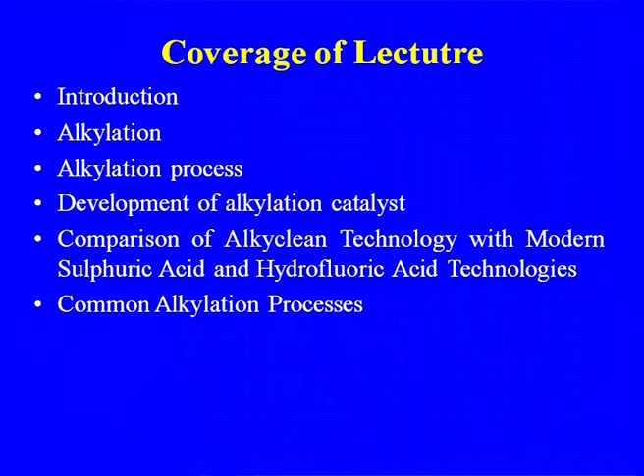Coverage of the lecture: the introduction, alkylation process, development of the alkylation catalyst, comparison of Alkyclean technology with modern sulfuric acid and hydrofluoric acid, common alkylation processes. Then isomerization, which will have again the introduction, isomerization catalyst, once through process, isomerization of light naphtha, UOP isomerization technologies, and then polymerization, some of the technologies available for polymerization or oligomerization, which, as I told you, are for improving the octane number.

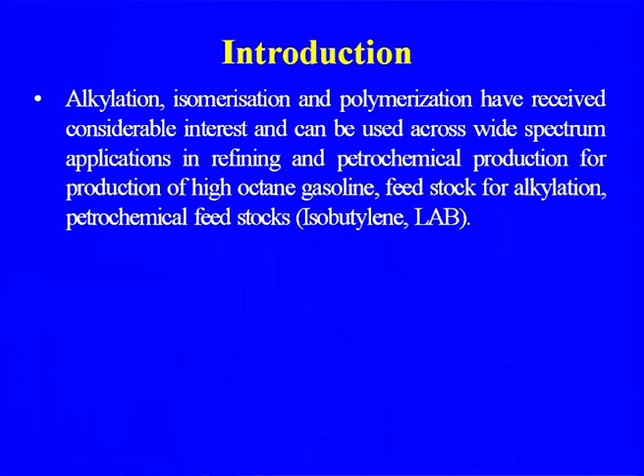Alkylation, isomerization and polymerization have received considerable interest and can be used across a wide spectrum of applications in refining and petrochemical production, for production of high octane gasoline, feedstock for alkylation, and petrochemical feedstock, just like isobutylene or linear alkyl benzene, where we are also using the alkylation process. Let us discuss alkylation. The feed is petroleum gas, olefin and isobutane, sourced from distillation and cracking; the process is unification, the product is high octane gasoline, and the application is the gasoline pool.

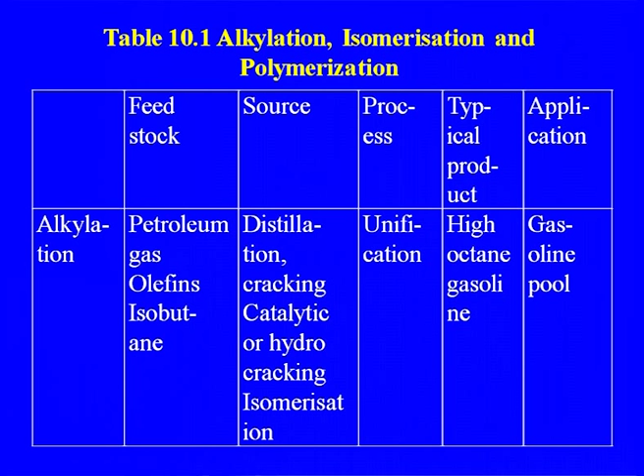Similarly, isomerization: feedstock n-butane, normal pentane, normal hexane, sourced from various refinery processes. The process is rearrangement, and the typical products are isobutane, isopentane, isohexane, and the application is alkylation and gasoline, which will go to the gasoline pool.

Polymerization: light olefins, C2, C3, C4, from various refinery processes. This process has become important with more and more FCC and generation of more light olefins, and those light olefins can be used in these processes for upgrading the octane number. The process is unification, the typical products are high octane naphtha and petrochemical feed, and the application is the gasoline pool.

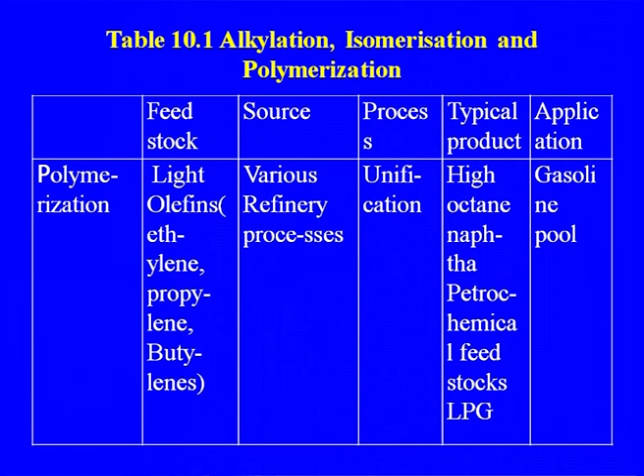Now, let us discuss alkylation. Alkylation is an important unit in the refinery to upgrade light olefins and isobutane into a high value gasoline component. Light olefins are produced mainly by catalytic cracking, from the FCC gases which we are recovering now, and there has been a lot of emphasis in refineries to separate the various useful C4 components, because C3 propylene we are already recovering. Alkylate is one of the best gasoline blends because of its high octane number.

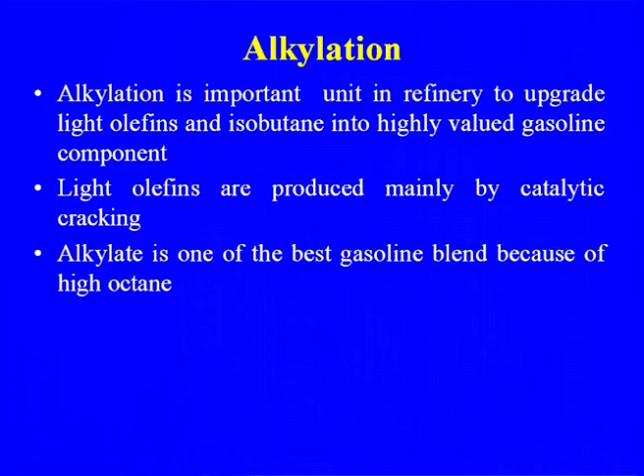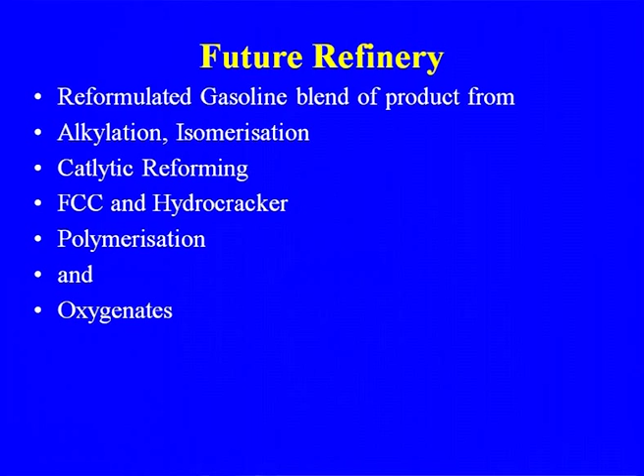So in the future refinery, we cannot totally depend upon crude oil distillation or only catalytic cracking or catalytic reforming; the gasoline pool will be a blend of various high octane gasolines from the various conversion processes. Reformulated gasoline will be a blend of products from alkylation, isomerization, catalytic reforming, FCC and hydrocracker, polymerization, plus addition of oxygenates, meaning methanol or alcohol. That will increase the total output of the refinery and at the same time give a better octane number.

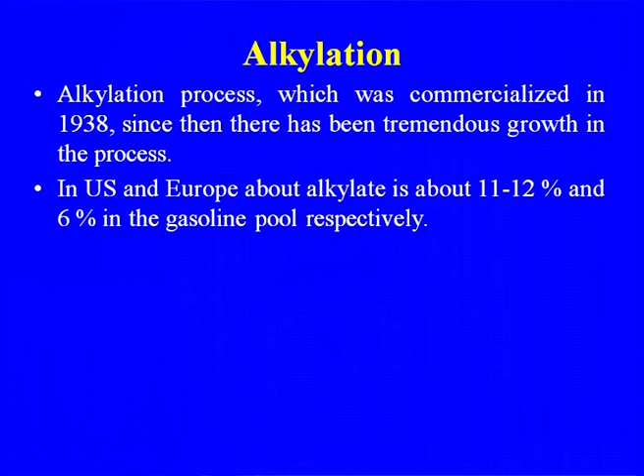The alkylation process was commercialized in 1938, and since then there has been tremendous growth in the process. Alkylate is about 11 to 12% of the gasoline pool in the US and 6% in European countries, but in India we still do not have the alkylation process in most refineries. I think the new refinery in Bathinda might have alkylation in it.

One of the major constraints in the adaptability of the alkylation process is the catalyst. We will be discussing the catalysts we are using and their development: the change from sulfuric acid to hydrofluoric acid, and from hydrofluoric acid to solid acid. These are some of the developments in alkylation, and in the future the alkylation process is going to play a very important role in increasing the octane number and at the same time enhancing the production of gasoline.

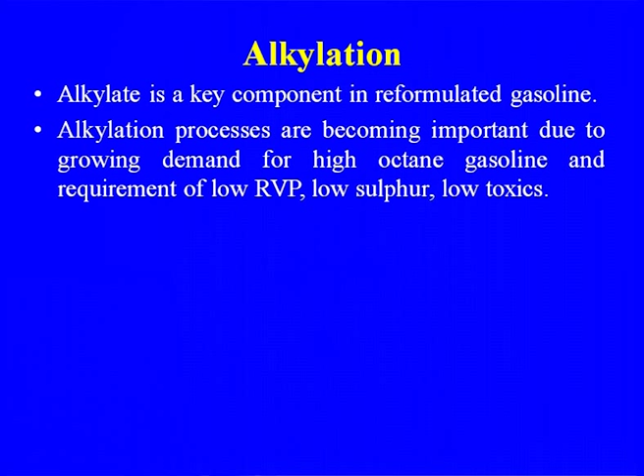Alkylate is a key component in reformulated gasoline. Alkylation processes are becoming important due to growing demand for high octane gasoline and the requirement of low Reid vapor pressure, low sulfur and low toxicity. Alkylate is an ideal blend stock to meet these requirements.

The process of alkylation of different isoparaffins using olefins was developed during the 30s using aluminum chloride catalyst. However, the catalyst was later replaced by sulfuric acid and hydrofluoric acid. We will discuss the problems when we compare these catalysts, sulfuric acid to hydrofluoric acid; in the case of hydrofluoric acid a lot of corrosion problems were there. So now the shift in catalyst is from HF to solid acid catalyst. Alkylation of the C5 cut from the FCC can significantly reduce the RVP of the finished gasoline pool.

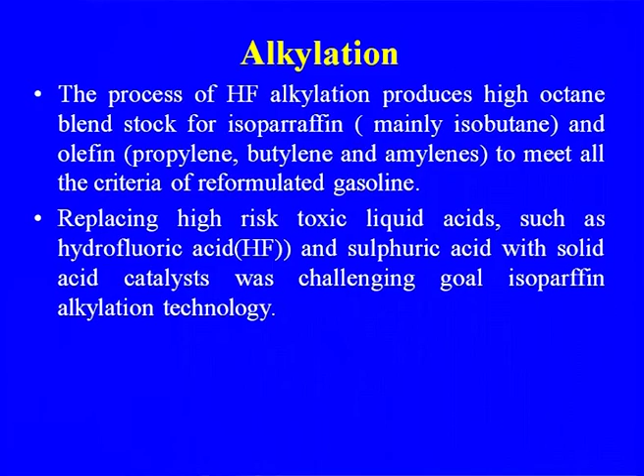Hydrofluoric alkylation was the earlier alkylation process, and it is still being used in many refineries. HF alkylation produces high octane blend stock from isoparaffin, mainly isobutane, and olefins, propylene, butylene and amylene, to meet all the criteria of reformulated gasoline. Replacing high risk toxic liquid acids such as hydrofluoric acid and sulfuric acid with solid acid catalyst was the challenging goal in isoparaffin alkylation technology, and this is the major development in catalysts: the shift from sulfuric acid to hydrofluoric acid and from hydrofluoric acid to solid acid catalyst.

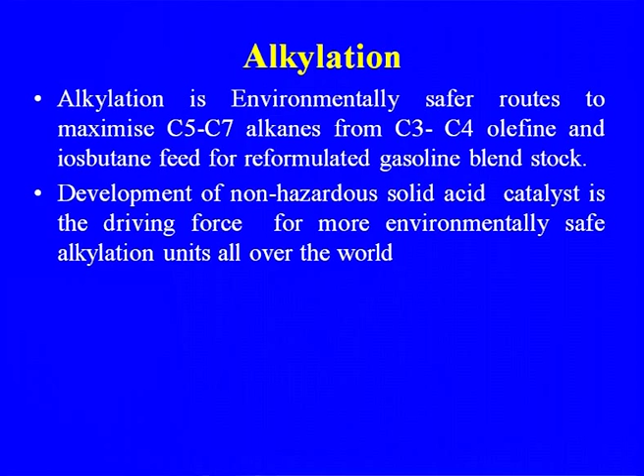So why we are going for alkylation: it is an environmentally safer route to maximize C5-7 alkanes from C3, C4 olefin and isobutane feed for reformulated gasoline blend stock. Development of non-hazardous solid acid catalyst is the driving force for more environmentally safe alkylation units all over the world, and now slowly mills are changing, going for the solid acid catalyst alkylation process.

Butylene alkylation is one of the most commonly used processes. However, for alkylation of amylenes, the C5 cut, as I told you, there is now more and more interest in recovery of C4 and C5 gases from the refinery. In some refineries, C4 isobutylene is used for making MTBE, methyl tertiary butyl ether, which is used as an oxygenate, but as I told you earlier, there is now a ban on the use of MTBE in many developed countries.

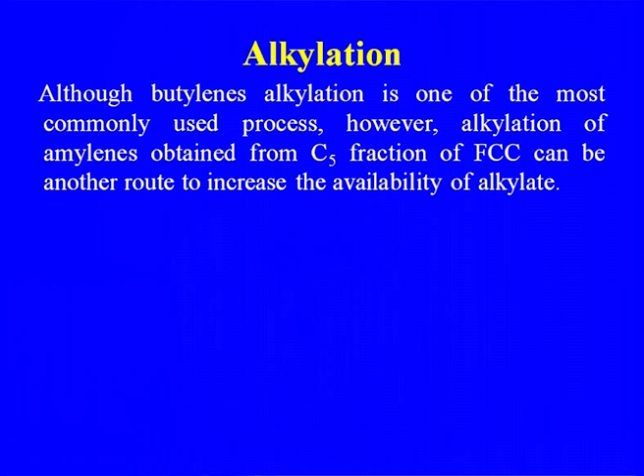So alkylation of amylenes obtained from the C5 fraction of FCC can be another route to increase the availability of alkylate, because the C5 fraction we are still not alkylating. C5 amylene alkylation has a two-fold advantage: it increases the volume of alkylate available while decreasing the Reid vapor pressure and olefinic content of the gasoline blend stocks.

The reaction involved in alkylation consists of conversion of isobutane and butylenes to isooctane using HF catalyst or solid acid catalyst, whatever catalyst you are using. The side reactions taking place result in increased isobutane consumption, increased acid consumption, increased acid soluble hydrocarbon formation, and equipment handling and corrosion problems.

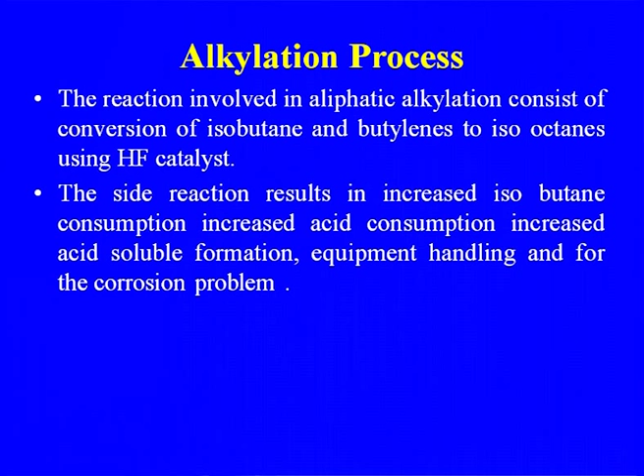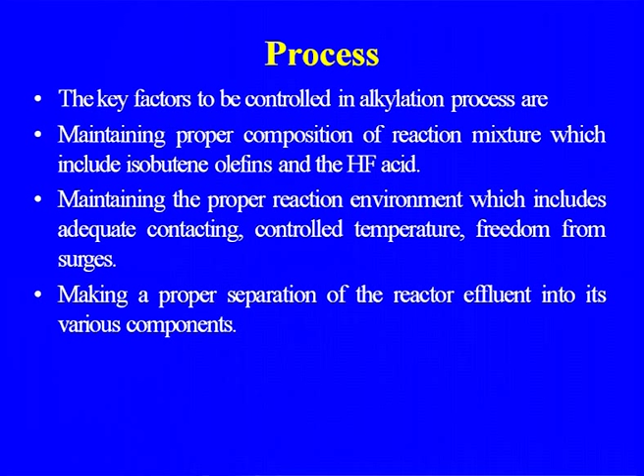The key factors to be controlled in the alkylation process are maintaining proper composition of the reaction mixture, which includes isobutane, olefins and the HF acid; maintaining the proper reaction environment, which includes adequate contacting, controlled temperature, and freedom from surges; and making a proper separation of the reactor effluent into various components.

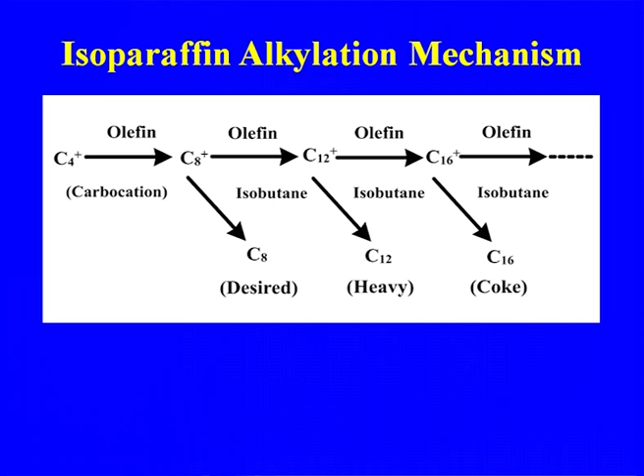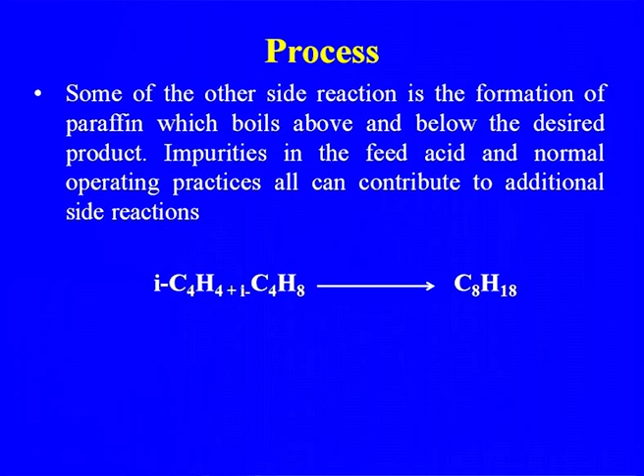So, let us discuss now the number of alkylation processes that have been developed depending upon the catalyst that is being used. The ConocoPhillips process, that is the alkylation of propylene, butylenes, pentenes and isobutane to high quality motor fuel using hydrofluoric acid catalyst.

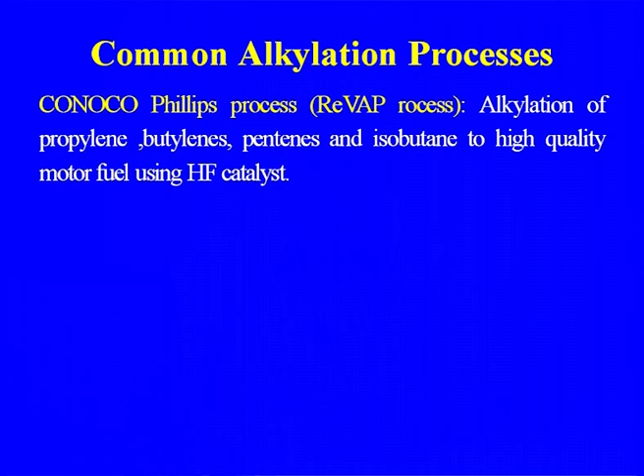UOP Alkylene process is based on the solid acid catalyst for alkylation of the light olefins. While discussing LAB we discussed the solid acid catalyst. Now, the alkylation process for LAB manufacture is based on the solid acid catalyst. Similarly, in the refinery also, the future refinery is not going to use HF, but solid acid catalyst for alkylation. So, this is the development of the catalyst by UOP.

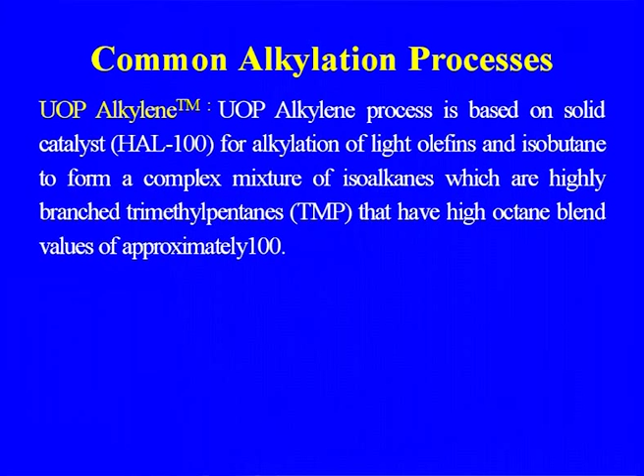So, the UOP Alkylene TM process uses the solid acid catalyst for alkylation of the light olefins and isobutane to form a complex mixture of isoalkanes, which are highly branched trimethyl pentanes that have high octane blend values of approximately 100. So, this is what our interest is, to have highly branched paraffins.

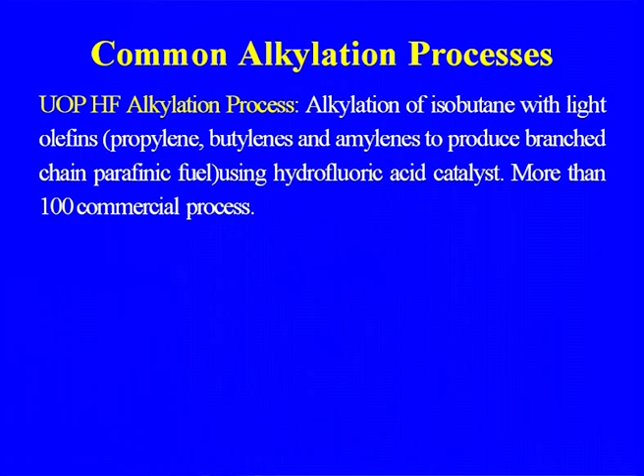UOP earlier had the HF process also. The UOP HF process is alkylation of isobutane with light olefins, propylene, butylenes and amylenes, to produce branched chain paraffins using hydrofluoric acid catalyst. That was more than 100 commercial processes, because most of the alkylation processes earlier started in refining were based on HF, but because of the highly corrosive nature of HF and the cost involved, and environmental constraints, the new refineries are shifting from HF to solid acid catalyst.

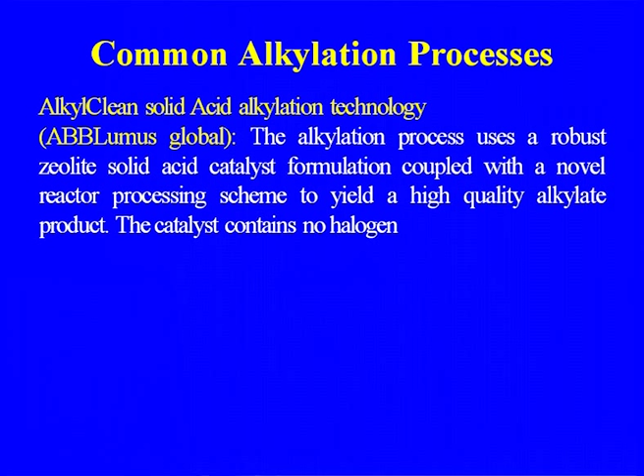ABB Lummus Global alkylation process uses a robust zeolite solid acid catalyst formulation coupled with a novel reactor processing scheme to yield a high quality alkylate product. The catalyst contains no halogen. Exxon alkylation process: alkylation of propylene, butenes, pentenes with isobutane in the presence of sulfuric acid catalyst using auto refrigeration, producing a low sensitivity, highly iso, low RVP, high octane gasoline blend stock.

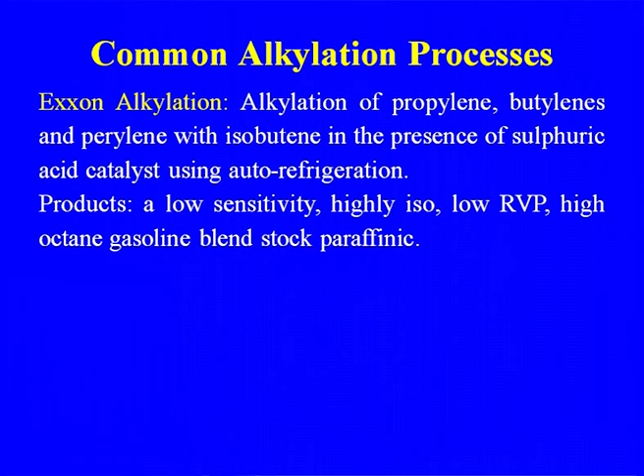But the only problem here is the use of sulfuric acid. Stratco's process: alkylation of propylene, butylenes and amylenes with isobutane using strong sulfuric acid to produce high octane branched chain hydrocarbons using the effluent refrigeration alkylation process, because low temperature is also one of the requirements of the process.

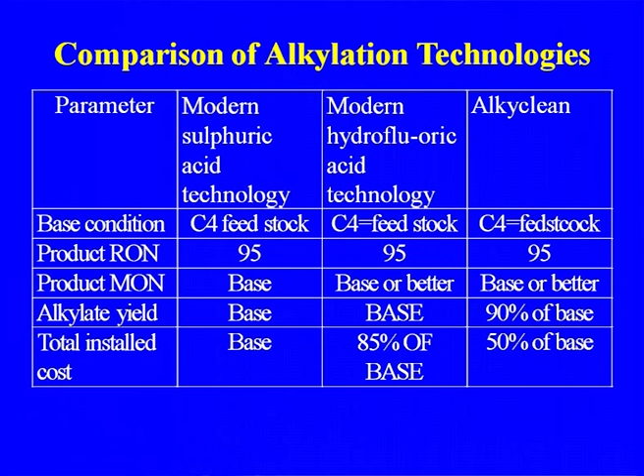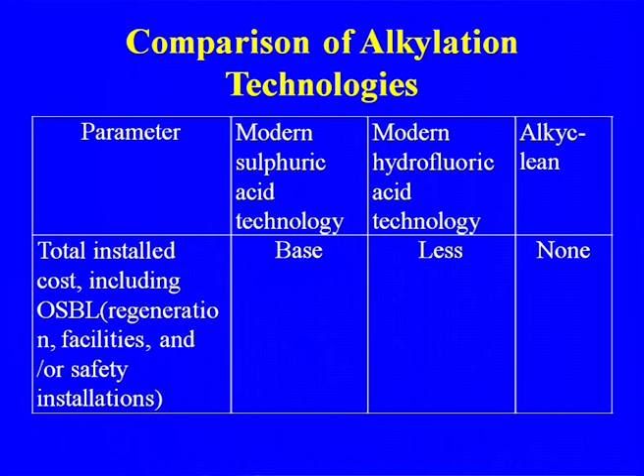Total installed cost is less here than sulfuric acid when you are using the catalyst. Total installed cost in case of hydrofluoric acid is less. Equipment maintenance is high versus much lower, that is one of the major advantages of the solid acid catalyst, the corrosion problem. Equipment maintenance is very high for sulfuric acid and hydrofluoric acid catalysts, and that is the reason why we are going for solid acid catalyst.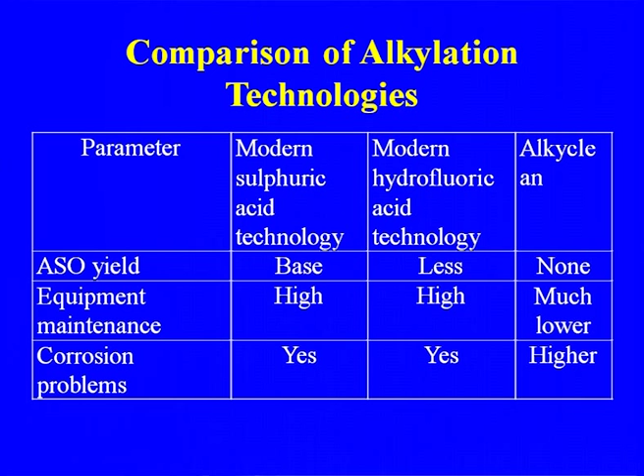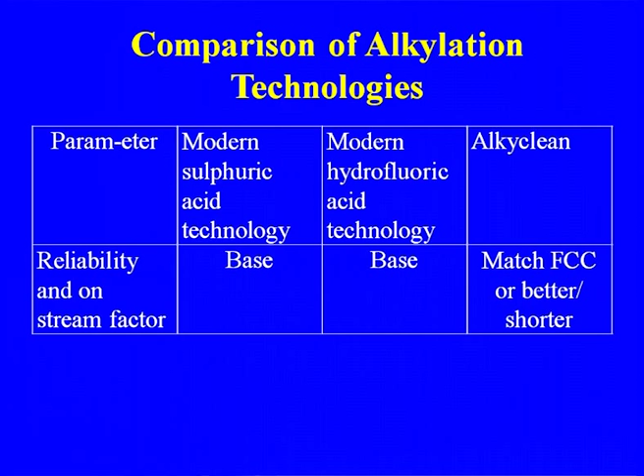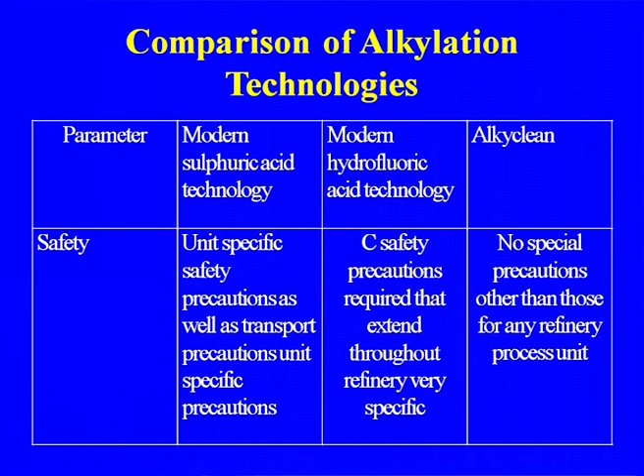Reliability on the stream factor, matching FCC or better. Safety: unit specific safety precautions as well as transport precautions, because depending upon the unit, safety precautions are required that extend throughout the refinery, because of the highly corrosive nature. Here no special precaution is needed, that is again one of the advantages of the solid acid catalyst.

Catalyst: here the zeolite catalyst. Environmental significance. Actually, if you compare HF and H2SO4, the amount of HF required is much less than what we use in sulfuric acid alkylation. And this was one of the reasons for shifting from sulfuric acid to hydrofluoric acid alkylation. So, in case of the solid acid catalyst, no emission to air, water or ground.

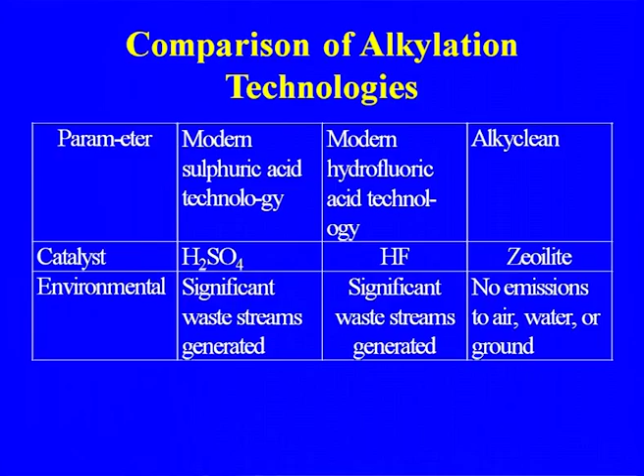This was about the alkylation process and the importance of the alkylation process. As I told you, the Indian refineries are not having alkylation; isomerization they already have. So more and more alkylation may come in the future, and with the development of solid acid catalysts it will be easier to go for alkylation than deal with the problems of sulfuric acid handling and corrosion.

Now the isomerization part. Just like alkylation, isomerization is also playing a very important role in the refinery as a major conversion process for improvement of the octane number, because the various streams produced in the refinery are low octane number products. So how to improve? One step for improving the octane number is the isomerization process. Petroleum fractions contain significant amounts of normal alkanes, and the isomerization of alkanes into the corresponding branched isomers is one of the important processes in petroleum refining.

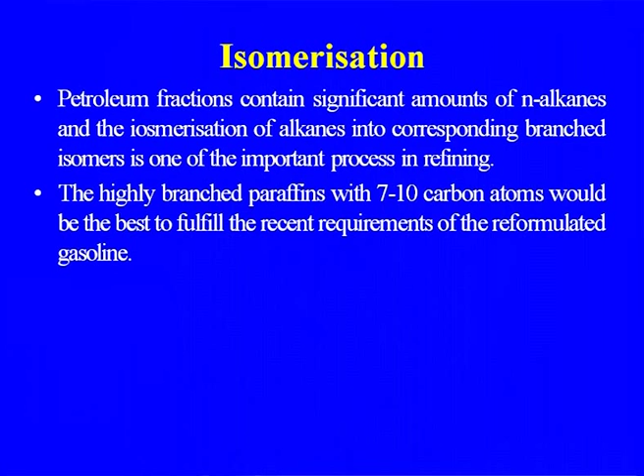The highly branched paraffins with 7 to 10 carbon atoms would be the best to fulfill the recent requirements of reformulated gasoline. What are the driving forces of light paraffin isomerization? Earlier, even Indian refineries did not have isomerization, but some refineries already have it now, and the new refineries are definitely going to have the isomerization part.

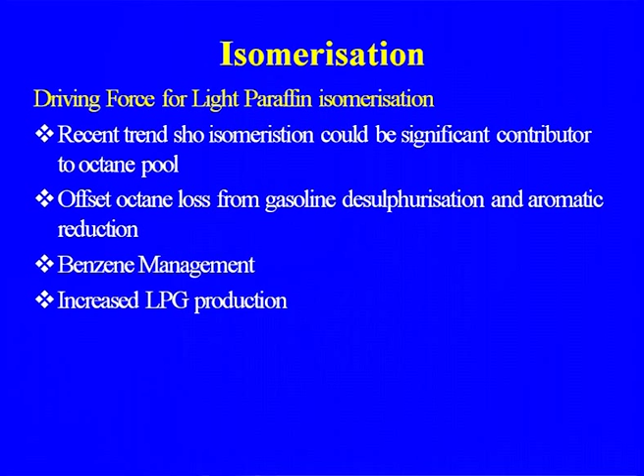So, driving force for light paraffin isomerization: the recent trend shows isomerization could be a significant contributor to octane number, offsetting octane loss from gasoline desulfurization and aromatic reduction, benzene management, and increased LPG production. For benzene reduction as per Euro 4 norms, the benzene content of gasoline has to be reduced to the recommended 1%. So now they are going for isomerate, including naphtha isomerization, and that will go to the gasoline pool.

The driving force is the emphasis on production of highly branched C5 to C7 alkane isomers from normal alkanes at low temperature for use in reformulated gasoline, to improve the octane number and the RVP, Reid vapor pressure, because RVP is also included in the standards and has to be controlled.

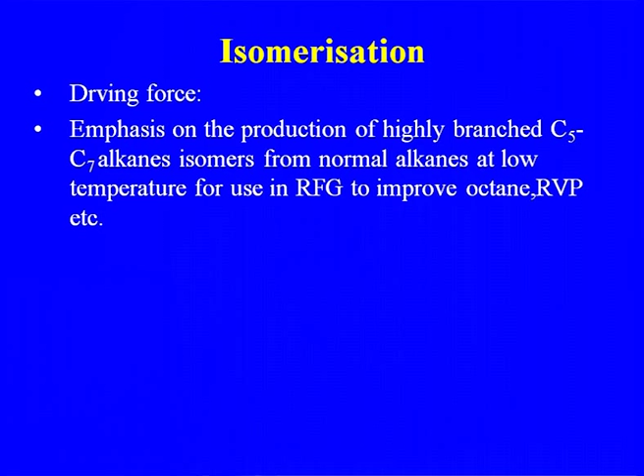Isomerate as a percentage of gasoline was widely implemented in the USA during the lead phase-out period, because that was when the requirement was how to improve the octane number. Tetraethyl lead was added, but because of environmental problems lead was phased out. Even Indian refineries no longer use tetraethyl lead for improving octane number; it has been phased out all over the world because of lead pollution. The US implemented isomerization in refineries, and more than 8% of their gasoline comes from isomerate.

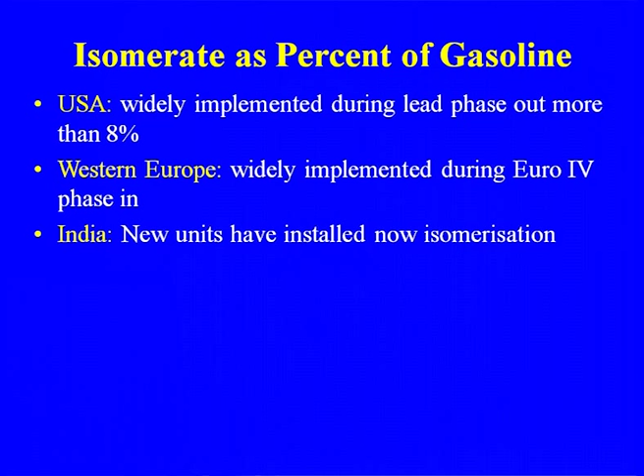Western Europe widely implemented it during the Euro 4 phase-in, and even some Indian refineries are now ready to provide Euro 4 fuel. New Indian units have now installed isomerization, but there is still a lot of scope for further isomerization processes in Indian refineries.

Now let us discuss isomerization. The production of paraffin-based high octane gasoline blend stocks such as isomerate from isomerization of light and mid-cut naphtha might be a key technology for gasoline supply to cope with future gasoline regulation. We are producing low octane naphtha, and as more gas crackers come, more naphtha will be available in the refinery, so converting low octane naphtha to high octane by isomerization will boost refining economics. Light naphtha and paraffin isomerization is recognized as an emerging technology to boost octane in light gasoline fractions.

Recent price trends show isomerization could be a significant contributor to the octane pool, offsetting the loss from gasoline desulfurization and aromatic reduction, because desulfurization has now become an integral part for removing traces of sulfur to meet Euro 3 or Euro 4 requirements.

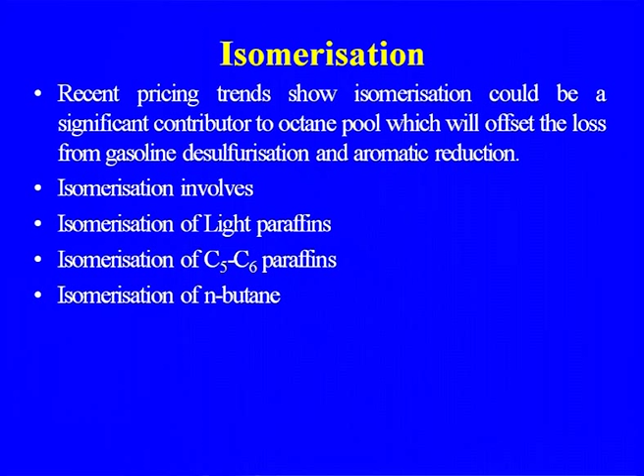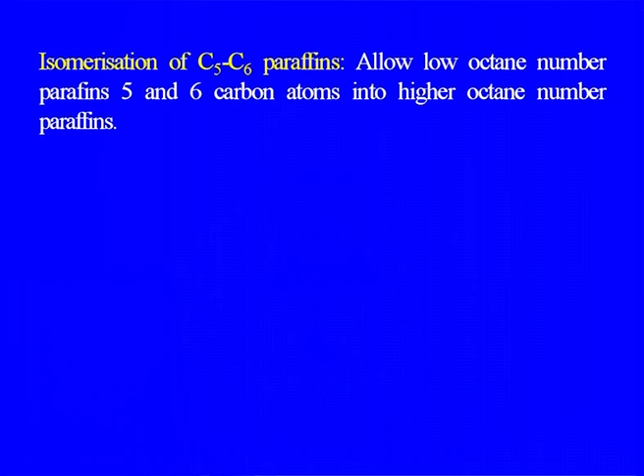Isomerization involves isomerization of light paraffins: isomerization of C5 C6 paraffins and isomerization of n-butane. Isomerization of C5 C6 paraffins converts low octane number paraffins with 5 and 6 carbon atoms into higher octane number paraffins. This is the advantage when you go for isomerization of C5 C6.

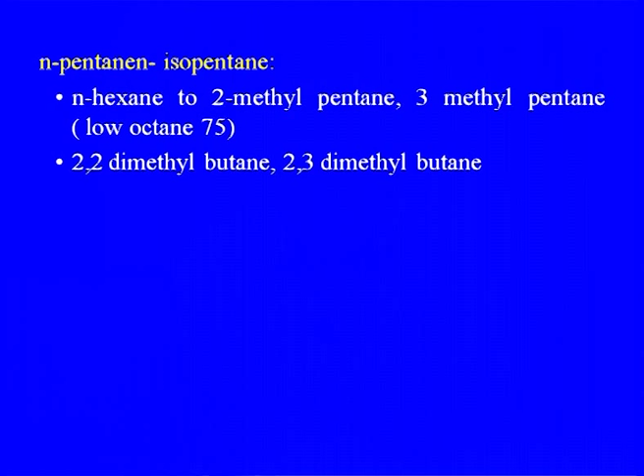N-pentane to isopentane, N-hexane to 2-methylpentane, 2,2-dimethylbutane, 2,3-dimethylbutane. Isomerization of N-butane to produce isobutene feed for alkylation or a source of isobutene dehydrogenation for the manufacture of MTBE.

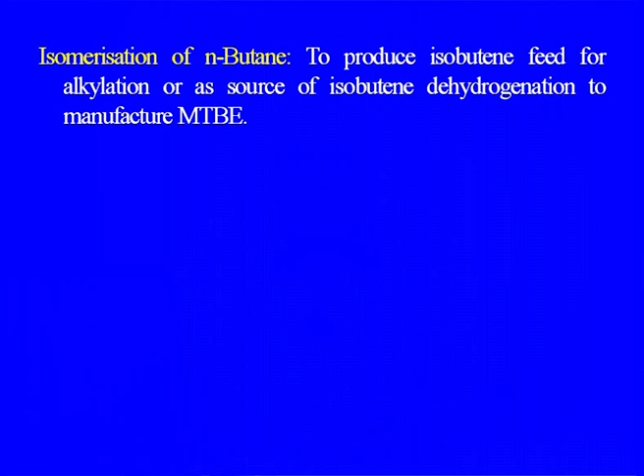Isomerization catalyst: as I told you, there has been continuous development in the isomerization process in the refinery. Two types of isomerization catalyst, zeolite and chlorinated alumina, have been used. The zeolite catalyst requires higher temperature and provides a lower octane boost, while chlorinated alumina results in the highest octane. However, it has higher sensitivity to feedstock impurities, requiring strict feed pretreatment to eliminate oxygen, water, sulfur and nitrogen containing compounds.

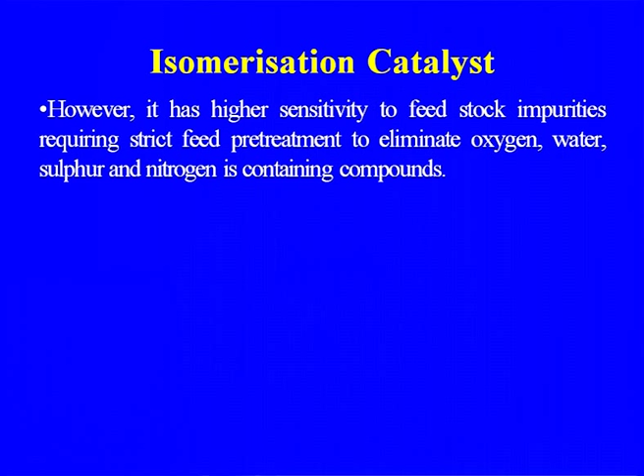Isomerization catalyst, as I told you, may be zeolite or chlorinated alumina. Zeolite catalyst requires higher temperature and provides a lower octane boost. Chlorinated alumina results in the highest octane; however, it has a higher sensitivity to feed impurities.

Isomerization of light naphtha: as I told you, some of the crude oils we have are more paraffinic. So, what to do with the light naphtha, which is more paraffinic and whose octane number is low? Many refineries have gone for isomerization of the light naphtha to improve the octane number. C5/C6 feed, either from straight-run crude distillation or from catalytic reforming, goes to the isomerization process. The reformate is separated into lighter, mostly benzene, and heavier containing C7. Catalyst: zeolite or platinum on chlorinated alumina.

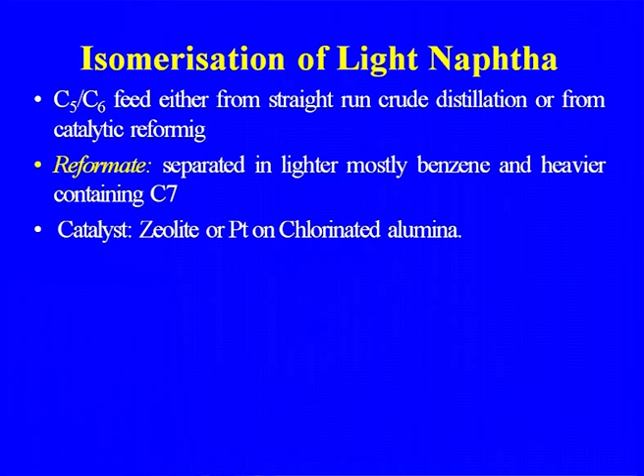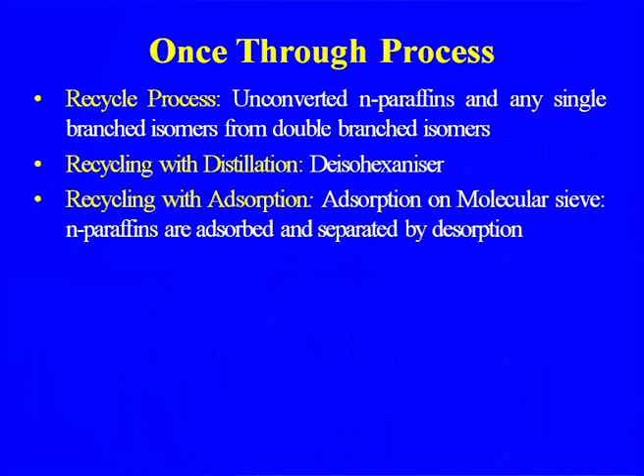Process: a recycle process separates unconverted normal paraffins and single branch isomers from the double branch isomers; recycling with distillation, where a deisohexanizer is added; recycling with adsorption, where the paraffins are adsorbed on molecular sieve and separated by desorption. So, these are some of the various types of configuration in the isomerization process.

As I told you, there has been continuous development in the catalyst, and a huge amount of money in refining is being invested for improvement of catalysts, whether FCC catalyst, catalytic reforming catalyst, or isomerization catalyst.

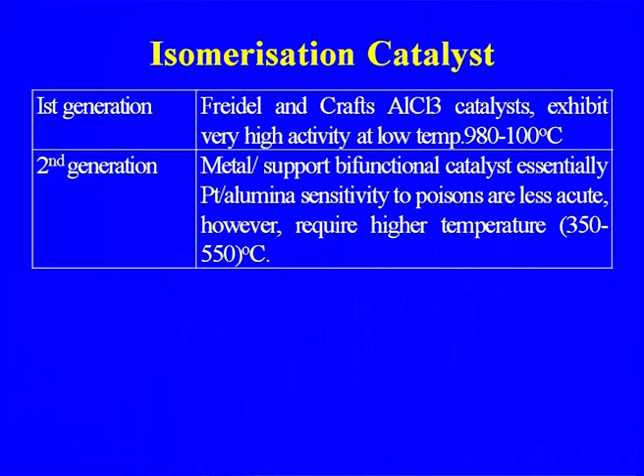First generation catalyst, from the Friedel-Crafts reaction: aluminum chloride exhibits very high activity at low temperature. Metal support bifunctional catalyst, essentially platinum alumina: sensitivity to poisons is less acute, however it requires higher temperature. Third generation metal support bifunctional catalyst with increased acidity by halogenation of the alumina support: sensitive to poison and needs pretreatment, corrosion problem, high activity at low temperature.

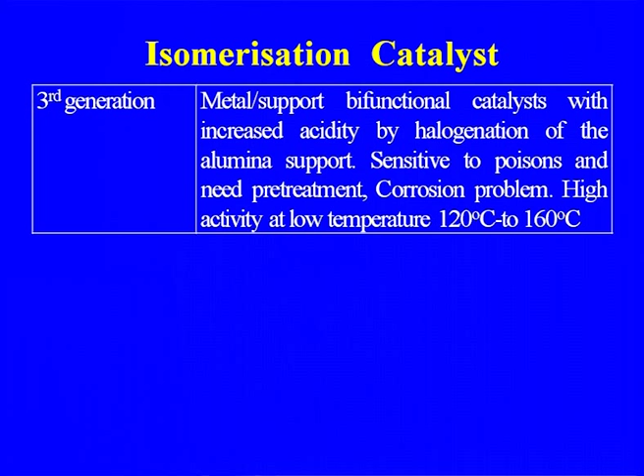Fourth generation bifunctional zeolite catalyst: very resistant to catalyst poison, and the feed does not need any pretreatment. So, these are the changes that have taken place in the catalysts used in the isomerization process. In all the catalysts, one of the problems is the presence of impurities in the feedstock.

Now, let us discuss some of the processes available for isomerization. UOP Butamer process: catalyst platinum chlorinated alumina, operating temperature 180 to 220, pressure 15 to 20 bar, space velocity 2 per hour, hydrogen to hydrocarbon ratio 0.5 to 2.

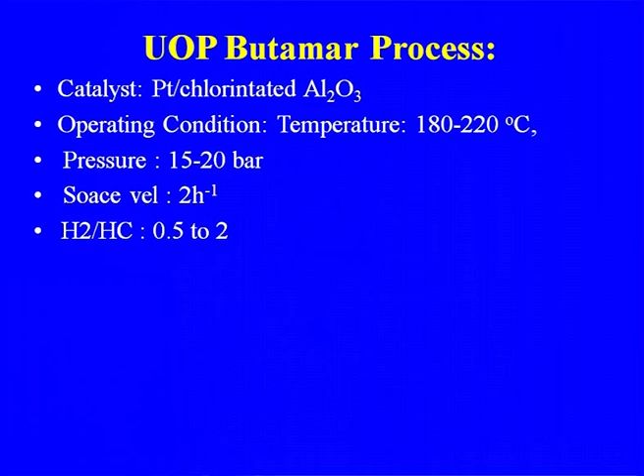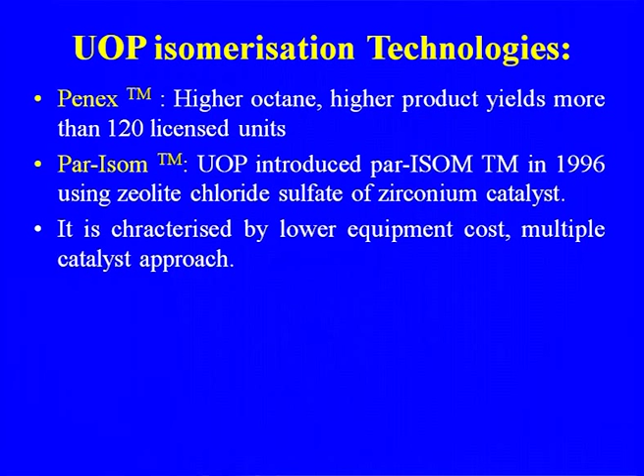Par-Isom TM: UOP introduced this process in 1996 using zeolite and sulfated zirconia catalyst. It is characterized by lower equipment cost and a multiple catalyst approach. Now, this was about isomerization and its importance in the refinery, where you can convert low octane hydrocarbons to high octane hydrocarbons.

Now, let us discuss polymerization. Do not be confused with the polymerization we use for the manufacture of polymers; it is mostly oligomerization. The polymerization process has received considerable interest in petroleum refining because of the high requirement of reformulated gasoline and the phasing out of MTBE.

I have been telling you this problem from time to time: MTBE came in a big way as a substitute for tetraethyl lead to increase the octane number, because the C4 gases, isobutylene, were available from the FCC gases, and methanol was there; a number of methanol plants came up just to supply methanol to MTBE plants. But there was leakage from MTBE tanks in the US, and so now there is a ban because MTBE is highly carcinogenic.

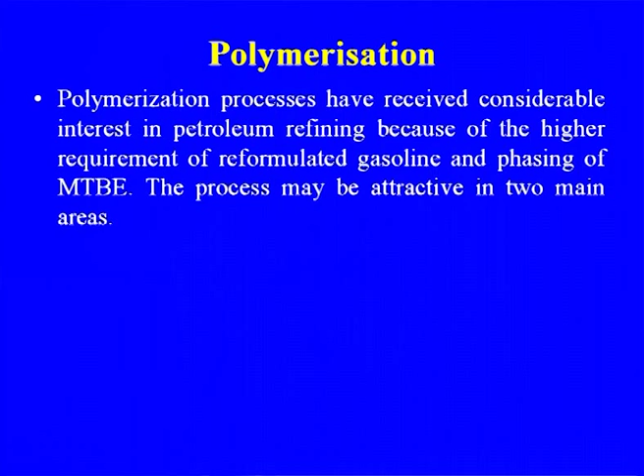So, many countries, developed countries, have banned the manufacture of the MTBE. So, the process may be attractive in two main areas, one from the petroleum and another from the petrochemical part. Upgrading of C2 and C3: temperature 150 to 200 degrees centigrade, pressure 30 to 50 bar, space velocity 0.3 to 0.5. Catalytic cracking for oligomerization of ethylene, propylene to olefin gasoline, producing high quality or middle quality gasoline.

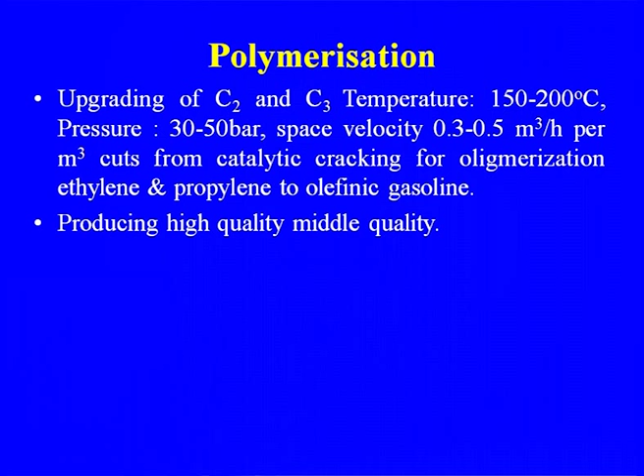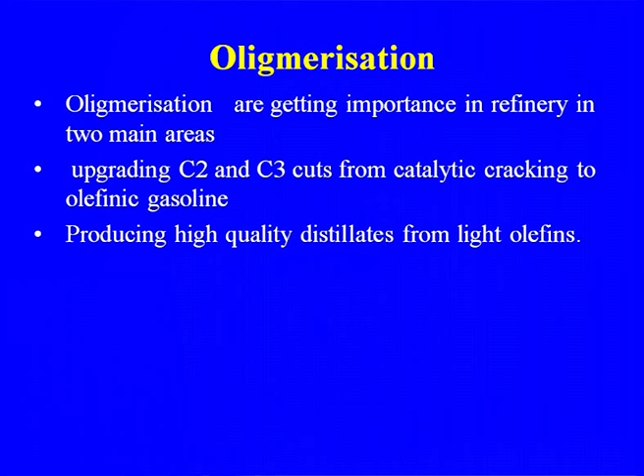Oligomerization is getting importance in the refinery in two main areas: upgrading of C2, C3 cuts from catalytic cracking to olefinic gasoline, and producing high quality distillates from light olefins. So, this is what happens in most of the oligomerization processes. Let us discuss some of the processes which have been developed in the case of polymerization, the industrial process, that is the UOP Cat-Poly process.

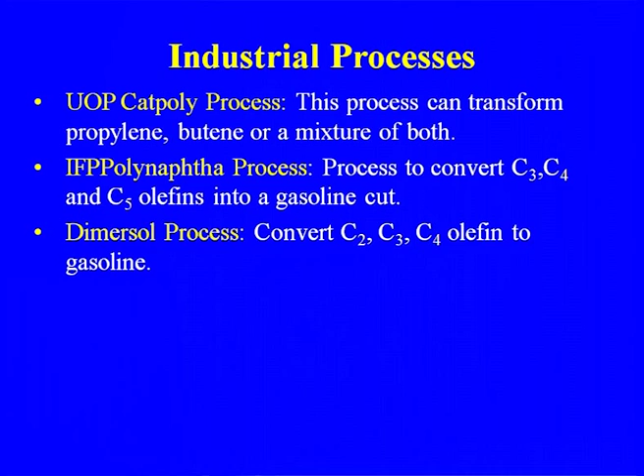This process can transform propylene, butene or a mixture of both to high octane gasoline. The IFP Polynaphtha process converts C3, C4 and C5 olefins into a gasoline cut. Then the Dimersol process converts C2, C3, C4 olefins to gasoline. In all the cases we are using C3, C4 and C5 olefins available from the FCC gases, which can be used for improving the octane number, and we can utilize these gases which are still not being used in many of the refineries.

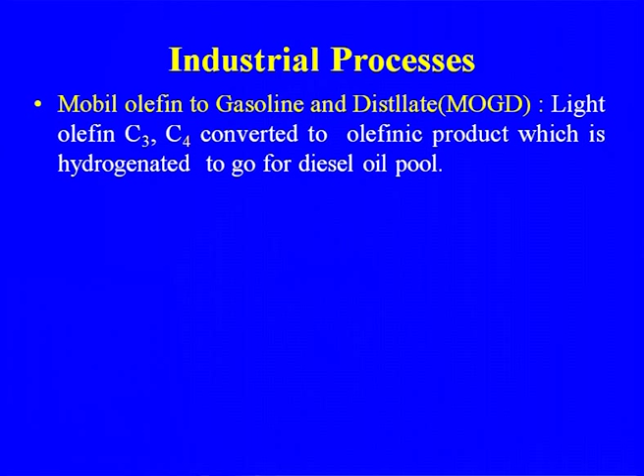Mobil olefin to gasoline and distillate technology, light olefin. Here again we are using C3, C4 converted to olefinic product which is hydrogenated to go to the diesel oil pool. So, this is about the alkylation, polymerization and isomerization processes used in the refinery. In the future, all three processes are going to play a very important role in improving the octane number, improving the availability of high octane gasoline, and at the same time utilization of some of the gases and the low octane naphtha which is more paraffinic.

This is the reason why now all the refineries are getting interested in isomerization, alkylation, or polymerization. The only constraint for the lesser adaptability of the alkylation process was the acid catalyst, hydrofluoric acid alkylation. But with the coming of solid acid catalysts, the problem is going to be less, at least so far as equipment corrosion is concerned, and that is why there is more and more interest in the alkylation process. Same thing is in isomerization.